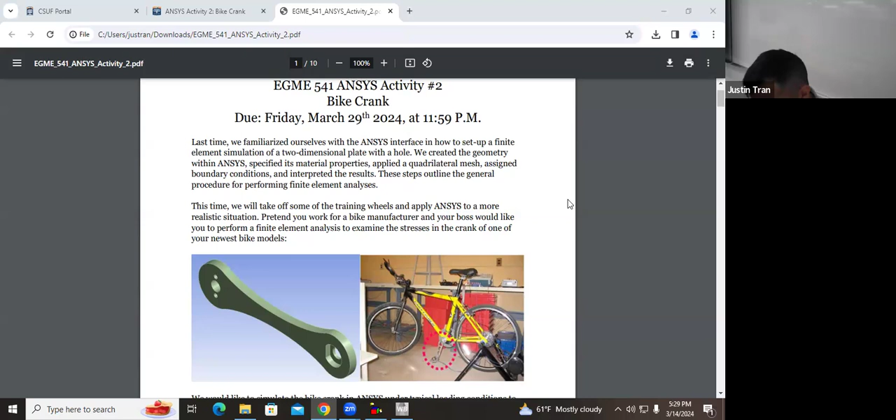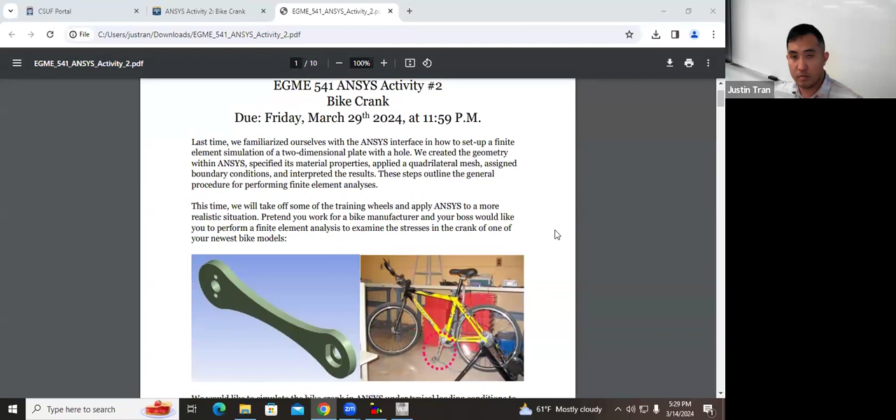I'm guessing the steering leg gets rounded, right? Okay, like how's it gonna, it kind of needs to grip from the ground. So far it's been tested on asphalt, sand, and grass. Oh okay, well those aren't really rough. Well, what about like marbles? I mean, I don't think there's much demand for a robot that walks exclusively on marbles. Maybe a rich person wants a different type of room, but maybe. If it's a smooth level surface like that, you can just use wheels, you don't need legs if it's... What if it's like the...

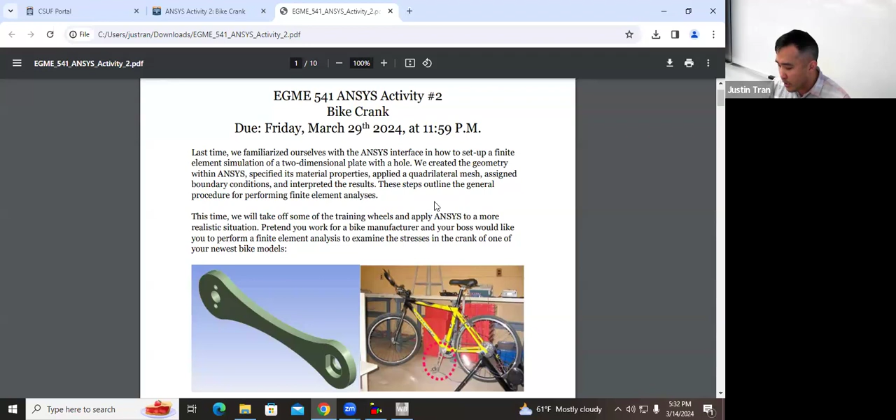We're going to be doing a simulation on a bike. If you don't know what a bike crank is, it's basically the part that connects the bike and the pedal. It's the part that cranks the bike forward—you push down on it with your foot to propel the bike forward.

The setting for this activity, or the motivation, is that you're going to be working basically for a bike crank manufacturer. We're going to run simulations to see if the bike crank is going to fail under the given loading or not.

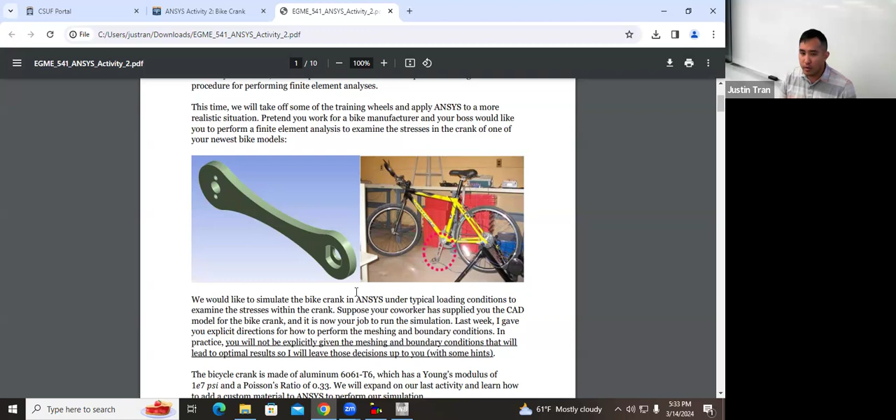Compared to the first activity, this time we're using a much more realistic geometry, one that's already made for you, so we're not going to spend any time making our own geometry here. We're going to be assigning our own material properties and applying the loads.

Compared to the first activity, there's not nearly as much instruction here, so it's not going to be as hand-holding as the first one—since you have all the knowledge from the first activity, as well as everything we've learned so far in the direct stiffness method. This activity is going to be more for you to take what you've learned from ANSYS and the direct stiffness method and apply it to a more realistic problem.

Okay, so let's go ahead and start up Workbench.

First thing we're going to do here is create our analysis system. If you remember, we looked on the left-hand side under the toolbox and chose what type of analysis system we're going to run for this simulation. The one we want is static structural, so go ahead and click and drag static structural into the project schematic. Once you do that, it's going to open up a window where we'll be operating on our activity.

Is everyone in Workbench with this part open? Good. First thing we're going to do here is add a custom material property—we didn't do this last time, since we just used a material already built into ANSYS by default. This is a really useful skill, because a lot of times in finite element simulation you'll be using materials that your company uses, or materials not already built into ANSYS. Knowing how to specify a new material based on its properties is really valuable.

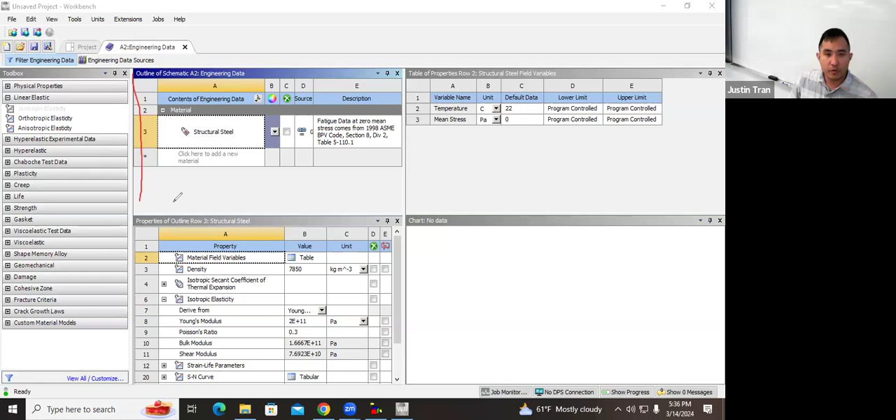To specify a new material, we're going to go to engineering data and double-click on it. As soon as you do, the window is going to change quite a bit, showing you all the different materials available to you. If you look at the center of the window, it tells you all the materials you currently can use—there's only one, so you should only see structural steel in there.

So what we're going to do is add a new material. To do that, click on the box that says 'click here to add a new material.' As soon as you click on that, it's going to let you type something in, so let's give our material a name. This is a completely custom material, so you can name it whatever you want—you could name it 'pee pee poo poo' if you want to—but usually it's useful to name your material after the material actually being used. The one we're using in this activity is an alloy of aluminum: aluminum 6061 T6.

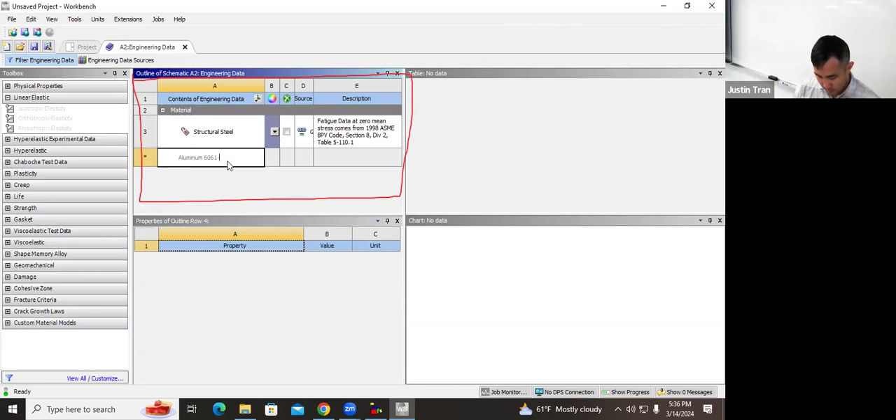Okay, so go ahead and type in the name of your material and hit enter. When you hit enter, it's going to create a new material here in your engineering data.

After you create your material, there's a blue question mark next to it. Whenever you see a blue question mark in ANSYS, that's its way of telling you that we need to specify more information before moving forward, because all we've done so far is give a name for the new material. We haven't specified any of its properties yet.

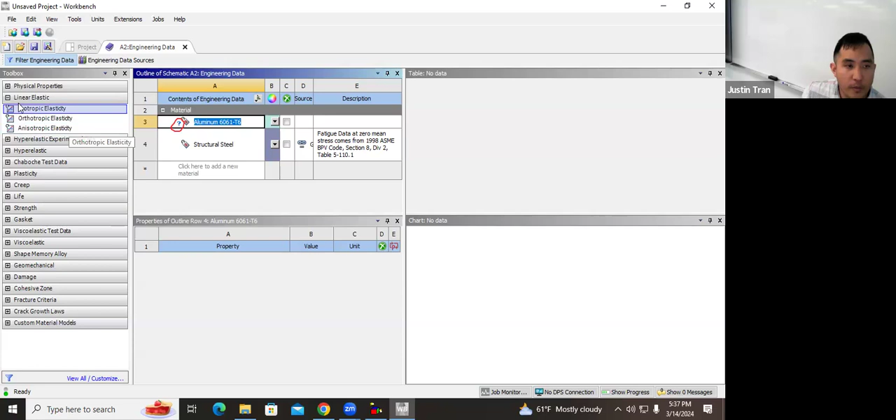But from here, you actually have a lot of different options. There are lots of different types of properties you can specify for your material. If you look at the left-hand bar, you'll see physical properties, linear elastic properties, hyperelastic properties, plasticity, creep, strength, all different kinds of things. All those different properties are used for different applications. But for a lot of applications, you only really need to specify a small portion of this.

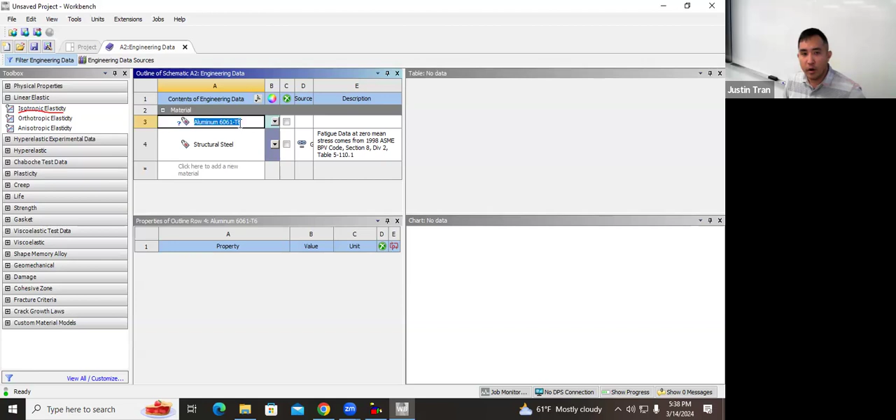For our case here, we're going to assume that our aluminum is an isotropic linear elastic material, so we're going to specify isotropic elasticity. While you have the aluminum 6061 T6 highlighted, you can either click on the row or click on the box itself. Then go to the left-hand side of the screen and double click on isotropic elasticity.

As soon as you do that, it's going to open up the properties window in the bottom center, and then you can actually start typing in the material properties.

If you look at the bottom middle of the screen, you'll notice there are two boxes in yellow. That's ANSYS's way of telling you that you should specify those two properties to fill this out. We need to fill in the Young's modulus and the Poisson's ratio.

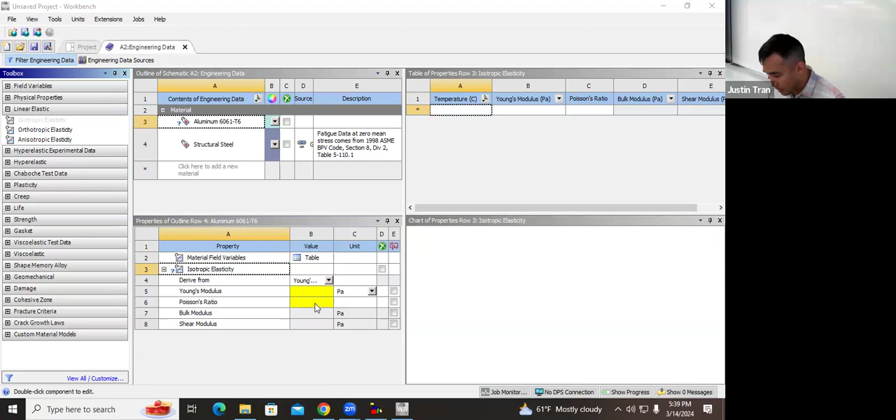For the Young's modulus, you can see the default is to specify it in Pascal. But if you look at the problem document, you'll see that the Young's modulus for our aluminum is actually given in PSI, so let's make sure we switch the units here to PSI.

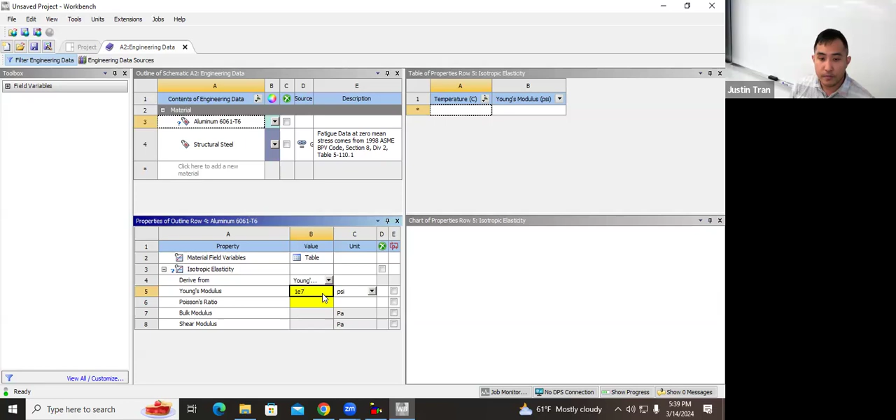We're going to input the Young's modulus of 1 times 10 to the 7th, so 1E7. You're going to enter 1E7 and then hit enter, and you want to make sure that you're in PSI. That's the number one mistake people make in this assignment - not changing the units for the Young's modulus.

The other thing we're going to input here is the Poisson's ratio. If you go back to the problem document, you can see that the Poisson's ratio for this bike crank is 0.33, so we're going to enter 0.33 here.

So all we've done here is define a new material, aluminum 6061 T6. We've defined it as a linear isotropic material, and we input the two material properties needed for it, which are the Young's modulus and the Poisson's ratio. Any questions on this?

How do you know the material is isotropic? It's a good question. Usually most metals are going to be pretty isotropic, just because the molecular structure of the metal is pretty uniform in all directions. That basically means the strength is going to be the same in all directions. Most metals behave like that, though there are exceptions - it really depends on the type of material you have.

If you have something like a wood material, wood usually has a grain direction, so you're going to have more strength in that direction. For those, I would specify an orthotropic elasticity type of material. A composite material like carbon fiber is going to behave differently too. So every material is a little bit different, but for the most part, most metals are pretty isotropic.

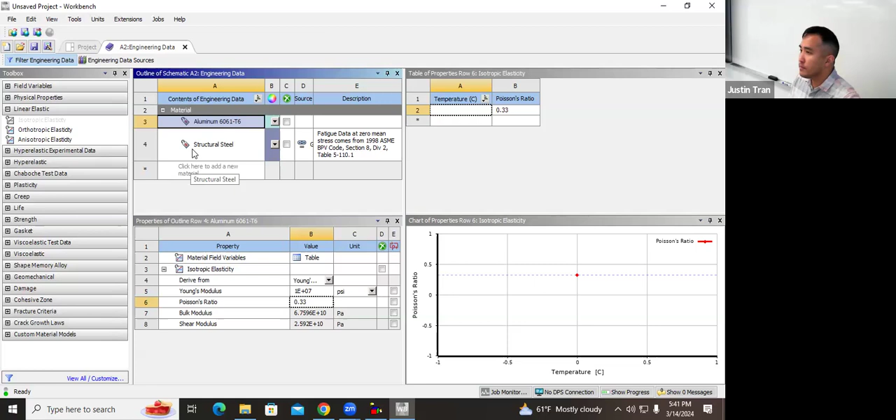Any other questions on this part here? Okay, all right, so let's go ahead and close out of this.

So we've done everything that we need to in the engineering data, so let's close out from this tab. If you go to the top ticker here, there's a tab called A2 engineering data, and you can just click on the X to exit out of that. That'll bring us back to Workbench here.

So the next step here is we need to import our geometry. Unlike the first activity, where we drew our geometry from scratch, here we're going to import it because someone else has already made the CAD file for us. This is pretty typical. A lot of times when you're running finite element analysis in a company, you're either going to create the CAD file in another software, like SolidWorks or CATIA, or someone else is going to make it for you and give you the file.

To import a geometry, you're going to right-click on geometry here, then go to Import, and click on Browse on this button here. What this will do is open up a file explorer where you can upload or import the CAD file.

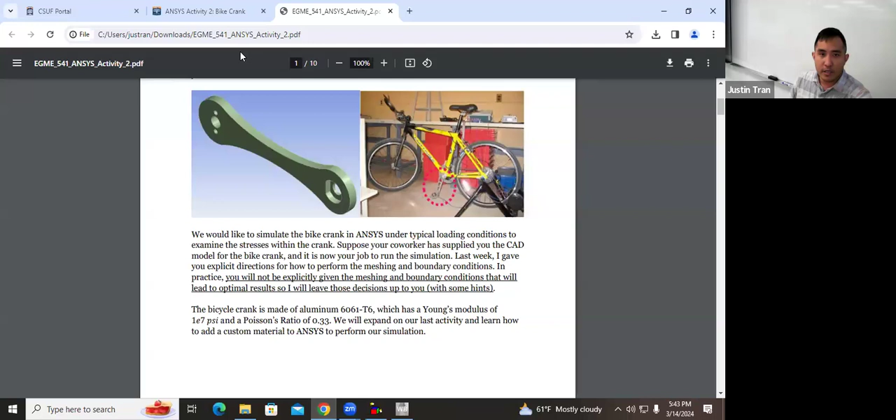If you haven't done so already, the CAD file for this activity is given. If you go to the Canvas site under ANSYS Activity 2, you'll see there's an additional download here for crank_assembly dot x_t. Let's go ahead and import that. To import the geometry, you can either double click it, or click it and open, either one's fine.

You'll notice that after you do so, there'll be a green check mark next to the geometry, which tells you that the import worked.

The main question I usually get in this part is: what are the file formats accepted by ANSYS? If you notice the file format for the part we just imported, the file extension is x_t. Windows may misidentify this as a SolidWorks file format, but x_t is actually a file format called Parasolid. Parasolid files work.

Another file format that's very common is IGS format, so that's .igs or .iges, they both work. I would say those are the two most common ones that are used.

A file format that won't work is a direct SolidWorks default file format, so that's SLDPRT or something like that. The pure SolidWorks file is not going to work with ANSYS. So if you want to take a SolidWorks part and import it in ANSYS, you need to convert it to one of these file formats, either IGS or the one we're using right now, x_t.

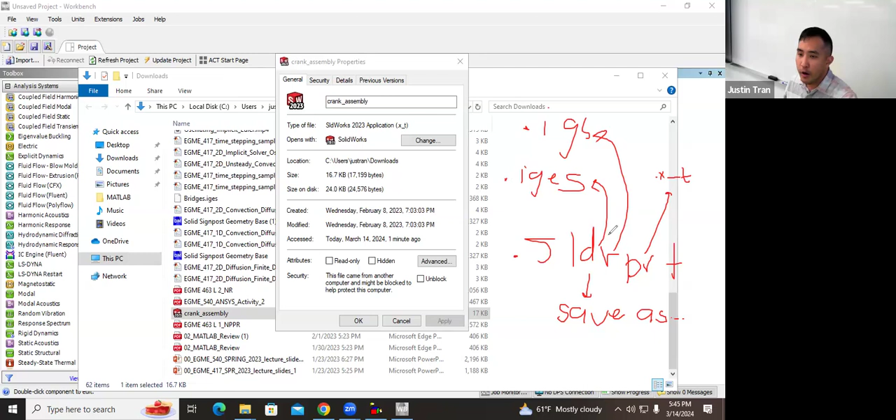When you have your part or assembly open in SolidWorks, all you have to do is just save as, and then save as one of these other file formats. But you do need to convert a SolidWorks file to one of these in order to use it with ANSYS.

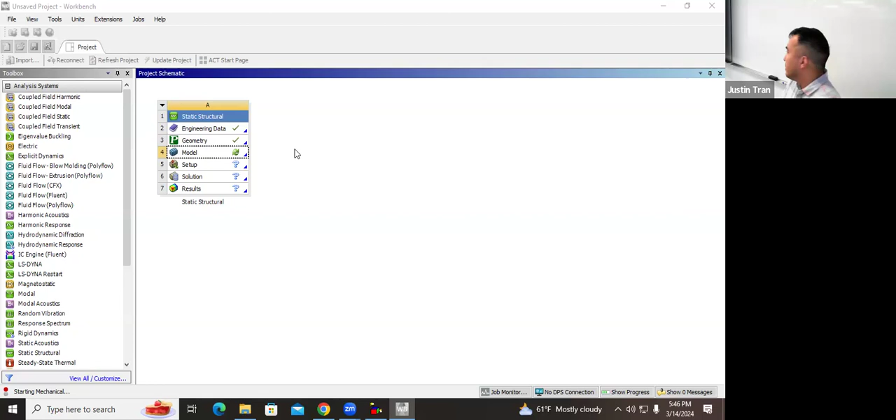All right, so now that we've imported our geometry, we are ready to open up ANSYS Mechanical. Go ahead and double click on model here. When you double click on model, it's going to open up ANSYS Mechanical. It might take a couple minutes to do so, but it'll get there eventually.

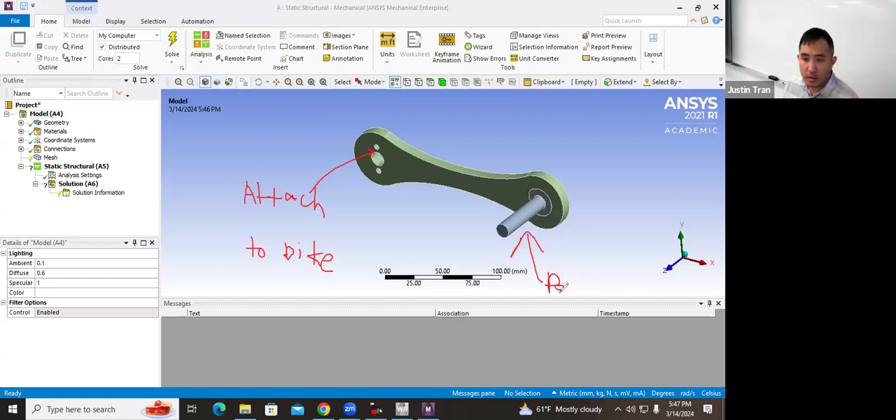Okay, and on this side we have the pedal side. This is where normally a person is going to be pedaling down. The pedal itself isn't there, but the little shaft that comes out is there.

So is everyone able to open ANSYS Mechanical and see the part as it is here? Okay, good.

The first thing you should notice about this part is that this is actually an assembly, with three different parts. Part one is the crank itself. Part two is this little shaft here that comes out for the pedal. And part three is this little mating ring that fits in between the crank and the pedal itself.

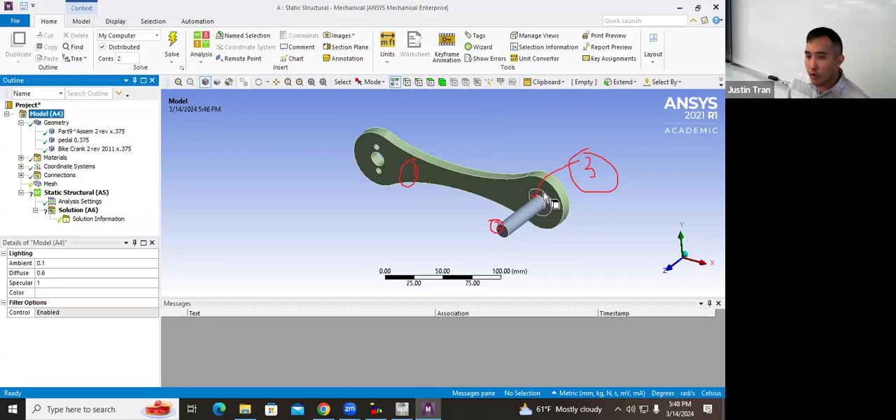The first thing we're going to do is, because our analysis is mostly focused on the crank itself, learn how to suppress different parts. This is very common. When working with finite element analysis of pre-made CAD files, oftentimes you don't need every part in the assembly. You want to just focus your analysis on the part you want to focus on. All the other parts just create dead space for you.

They're going to gunk up your mesh, or cause your simulation to be more expensive than it is. So to get rid of a part or suppress it from your analysis, what you need to do...

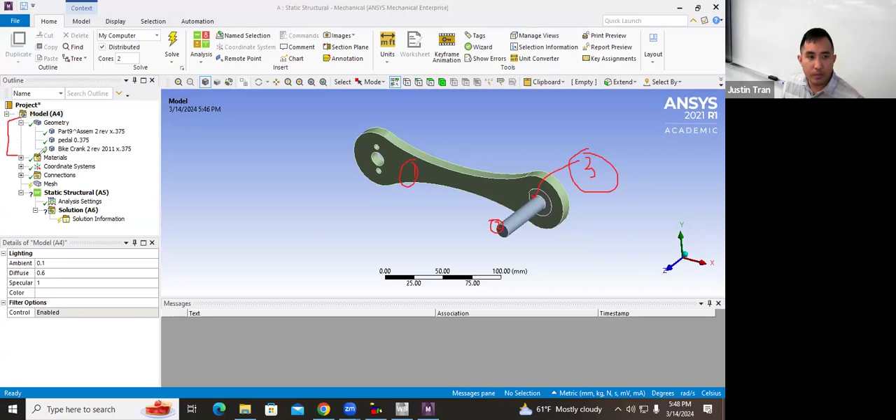Go to the left-hand side of the screen, go to the geometry tab. Expand that menu, and you'll see all three of the parts: bike crank 2 Rev 2011 X 0.375, the pedal 0.375, and the part 9 caret Assem 2 Rev x.375.

All we care about is the crank, so we don't really care about the pedal or the mating fitting at this point. To suppress a part, all you have to do is right click on the part that you want to suppress.

Then click on the button for suppress body. Go ahead and do that - you can do that for the pedal, or for part 9. If you notice, as soon as you do that, that part disappears from the image here.

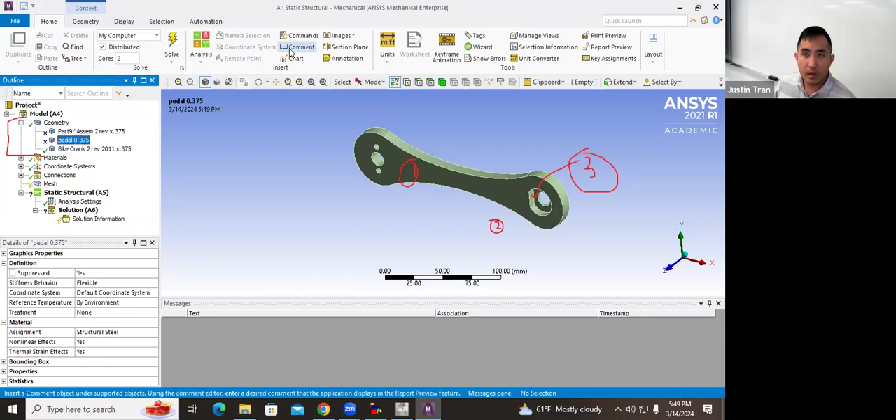I'm going to do the same thing for the pedal. Let me right click on pedal here and click on suppress body. That gets rid of the pedal as well. Make sure you do that - make sure you clear the other two parts.

The next thing we're going to do here is assign a material. Remember, we defined that custom aluminum material, and we want to make sure we actually assign this to our geometry here.

Under the same geometry menu up here, you're going to click on the bike crank object itself - bike crank 2 Rev 2011. Then go to the bottom left-hand side of the screen, and you'll see there's an option here for material assignment.

Right now the material for this crank is structural steel, and we want to change that. Let's go ahead and click on structural steel here. You're going to click on this arrow to expand the menu outwards.

Then you're going to change the material to your aluminum material that you defined earlier. Go ahead and click on aluminum, and that changes the material assignment of this part.

Any questions on that? Is everyone able to suppress the parts and assign the materials to the bike crank?

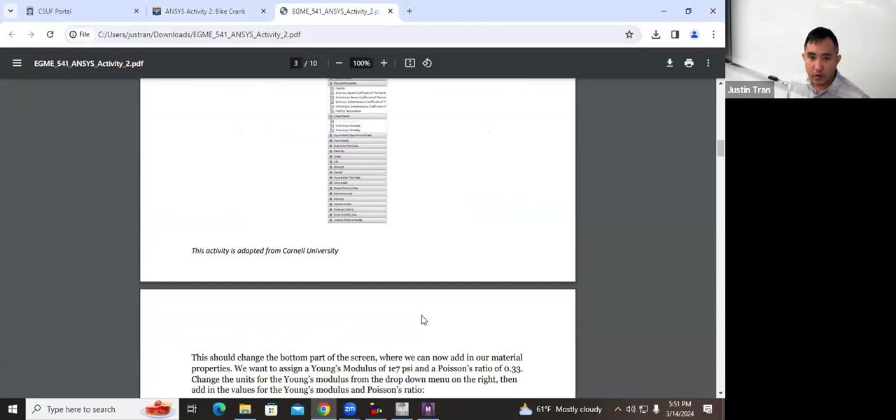All right, so that's all the new stuff for this part. The next step here is going to be the meshing. If you go to the problem document here, let me scroll down - we've done everything up until meshing here.

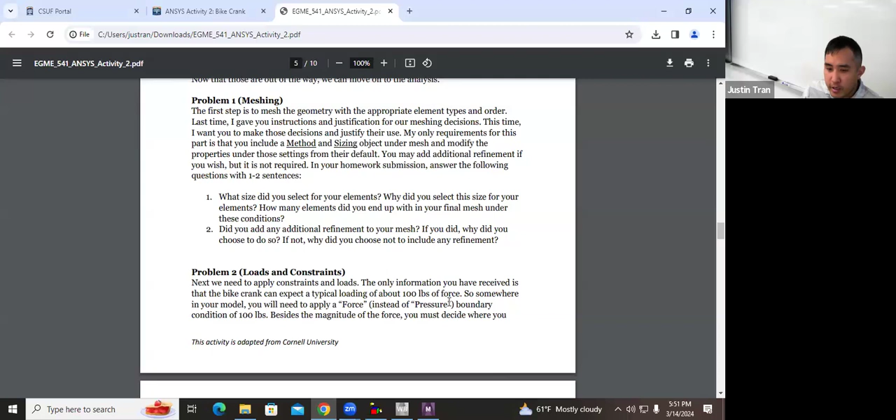So your next goal here is to apply meshing settings. The main thing you're going to set here is the size of the elements. If you follow the document here, it's going to say to create a method and sizing object - that's a little bit overkill.

The only thing I need you to do here is specify the size of the elements. When you left click on mesh, it's going to ask you for the element size here. Go ahead and assign a size for the mesh.

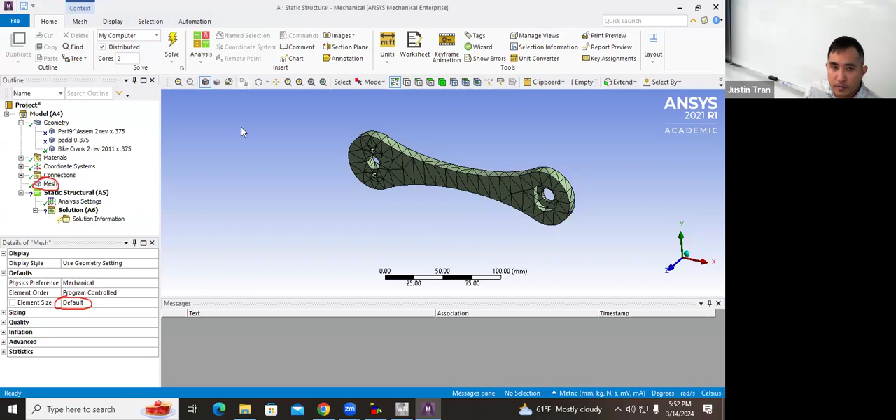And if you want, you can change the units as well. I think the default units is millimeters, but you can change it to US customary inches as well. So from the 5 inches, smaller.

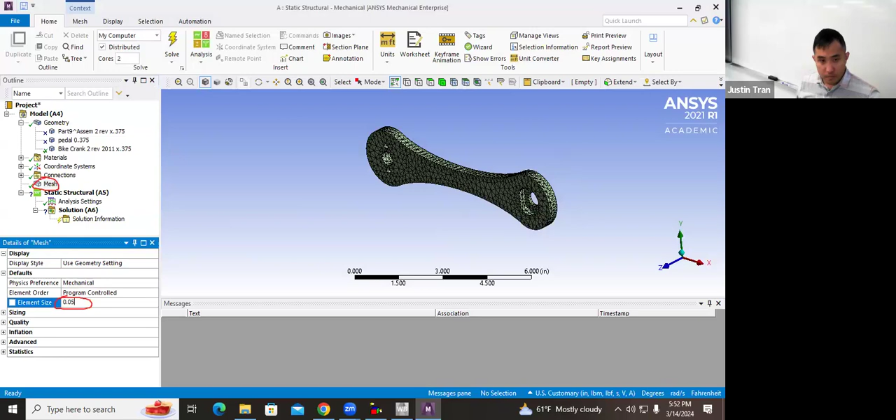So you could try different settings for the mesh. There's a lot of different meshes that'll work for this one. Again, this is still a relatively simple simulation, so there's a lot that can work. But your mesh should look roughly something like this.

So you should have a pretty good mesh density. In particular, if you rotate the part on its side, you can see here that we're looking at the thin dimension. If you look at this cross section here, you should see multiple layers of elements going across.

This is really important and a really good metric to know for finite element meshes in general. Whenever you have a mesh of a relatively thin object like this, you should be able to see multiple elements through the thickness, and it shouldn't just be one element across like this.

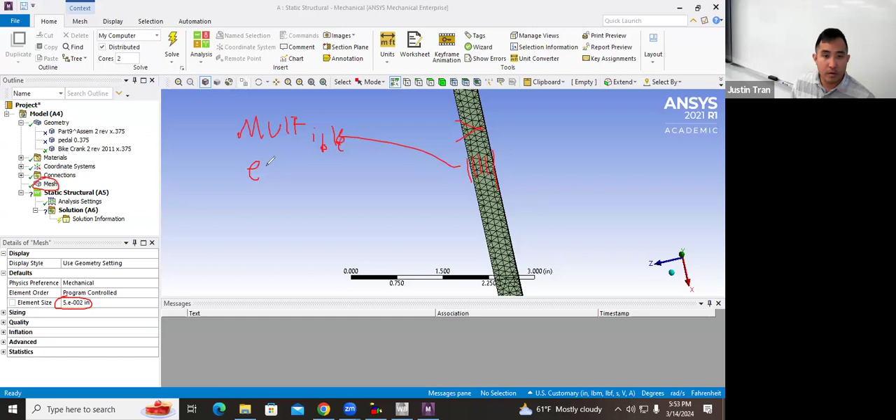The reason for this is that generally speaking, when you're making a finite element mesh, you want to have a good amount of what's called interior nodes—nodes that are on the inside here that aren't on the outside edges. So to do that, you need to have multiple elements through the thickness of the part.

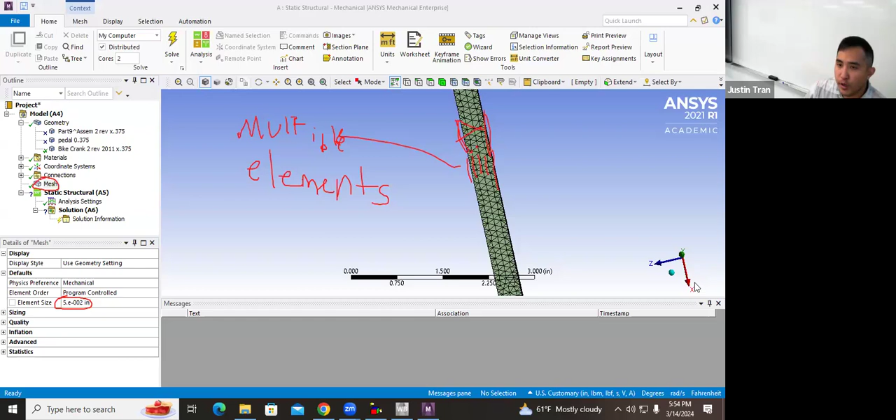So you want to avoid cases like this. Let me generate the mesh. You want to avoid cases like this where you have one element that goes all the way across the structure. So you want to have a good amount of elements through that thickness.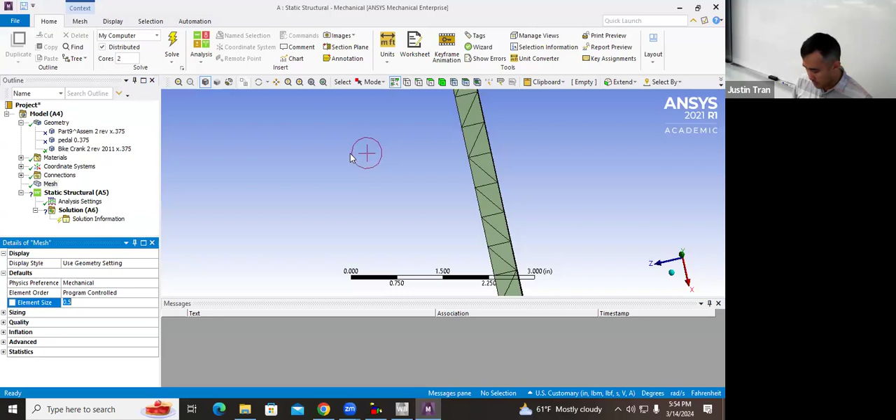Ideally you should have maybe 3 or 4, but even just 2 elements makes a world of difference. All right, any questions on the meshing here?

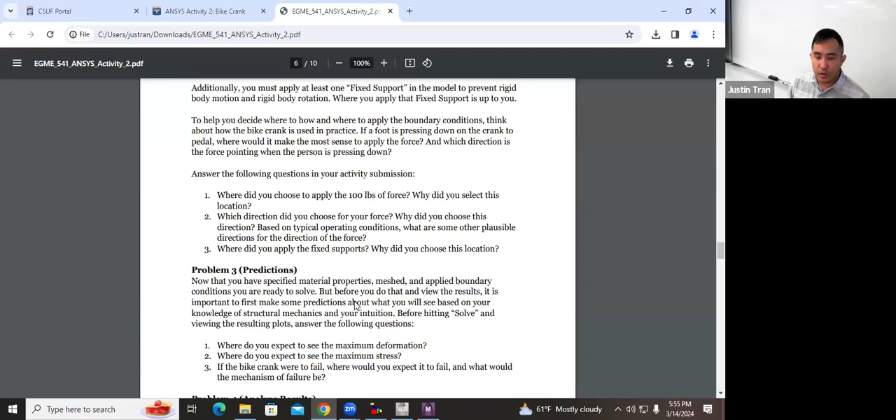So this next part, I'm going to let you guys work on yourselves a bit, but now you need to specify the boundary conditions—that means the loads and constraints. Just like we do for our direct stiffness problems, we need to have at least one fixed support.

To apply boundary conditions, you're going to right click on static structural A5, go to insert, and apply a fixed support. I also want you to apply a force, so you're going to right click on static structural A5, go to insert, and click on force here. That lets you apply a force in a certain direction.

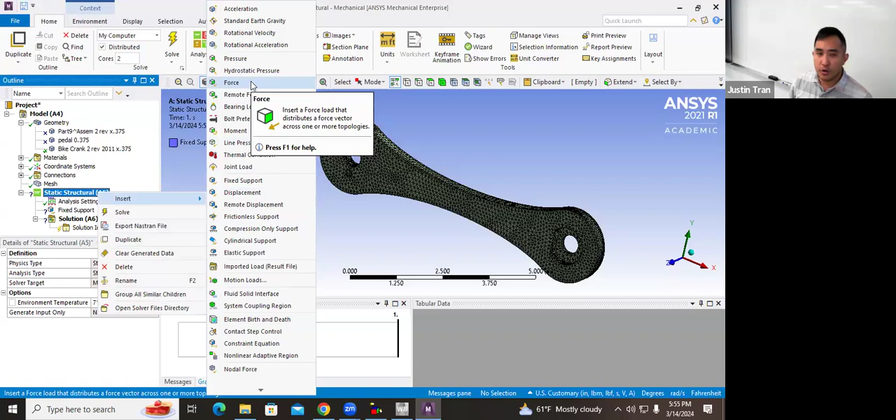But I want you guys to determine where these boundary conditions are applied, and even more particular for the force, I want you guys to determine what direction makes the most sense for the force.

For the force, remember the way that I generally like to do it is I like to specify my force in components. When you click on the force, if you go to the bottom left of the screen, you'll see there's a setting called define by. Instead of defining it by the vector, you can define it by the components, which lets you specify the X, Y, Z components of the force individually. I think that's a bit easier to specify.

So I want you guys to determine the direction and location of the force, but I want to give you a couple of hints. Remember when we first opened up this file, I mentioned that the side of the bike crank with the 3 holes is the part where it attaches to the bike itself. Whereas the other side of the bike crank with the single hole, this is where the pedal usually is.

So the pedal side is where a person's going to be applying their force, applying their weight, okay? And the bike side is where it's going to be attaching to the bike frame.

I want you guys to use finite elements to simulate a worst case scenario. Think about what the worst case scenario would be in terms of causing this bike crank to fail or to rupture, okay?

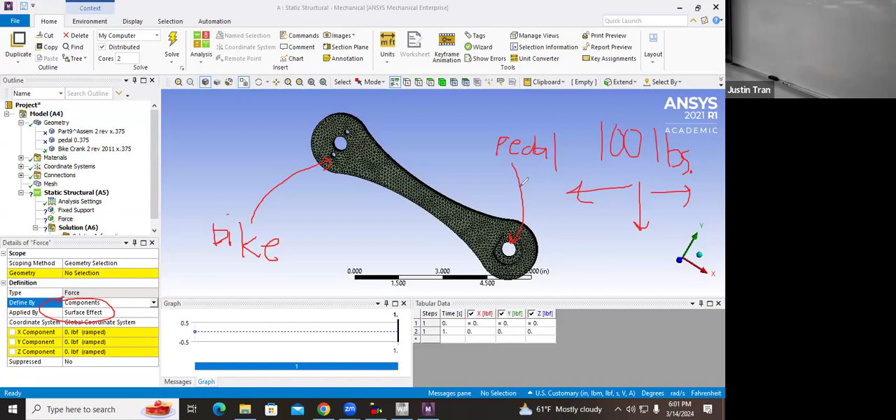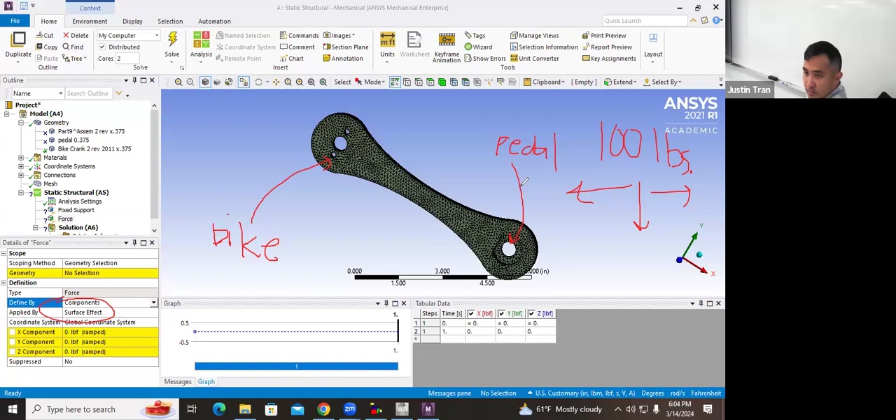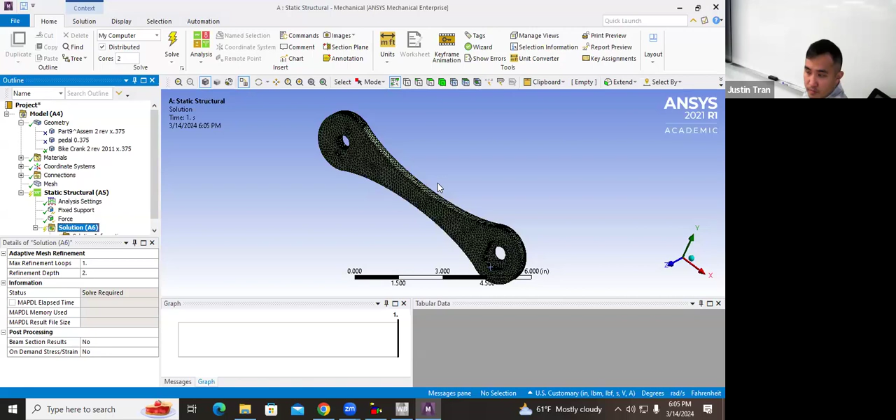All right, how's everyone doing? Everyone still applying their boundary conditions? Okay, all right, so I'll let you guys play around with that a bit more.

I'm gonna show you how you can check your results right now. So now that we have the mesh, now that we have the boundary conditions, we are ready to run the simulation. But before we run it, we need to specify our output field.

So we're gonna right click on solution A6, we're gonna insert. The first thing we want to see here is the total deformation, so make sure you specify that as one of your output fields. The other thing we're going to specify here is the equivalent stress.

So we're going to right click on solution A6, go to stress. Make sure you click stress, not strain. And you want to view the equivalent stress. Okay.

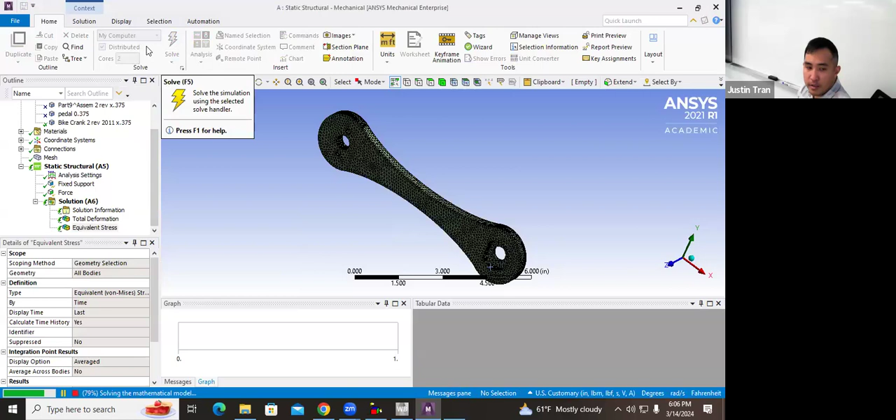All right, so let's go ahead and click solve. Solve with the lightning bolt that's kind of at the top of the screen here.

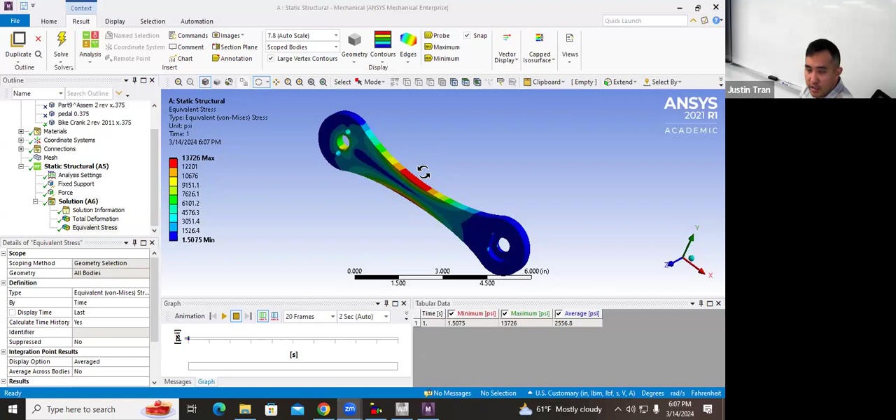Depending on the direction and location of your force, your stress may be different. So if you did not get this stress, or at least this distribution, you may want to reevaluate. Maybe change the direction of your force, maybe change the location.

But to give you a hint in terms of how I obtained this: whenever you have a situation where you have a beam or anything that's fixed on one side, the loading situation that's going to cause the most stress or danger of breaking is bending.

So you want to think about what direction you want to put your 100-pound force to force this bike crank into a bending mode. If you're not getting a stress as high as this, you may want to change the direction of your force.

So that's the first thing to do. I want you to find the direction of force that would put this cantilever beam in bending, so that you can recreate the same stress that I'm getting here.

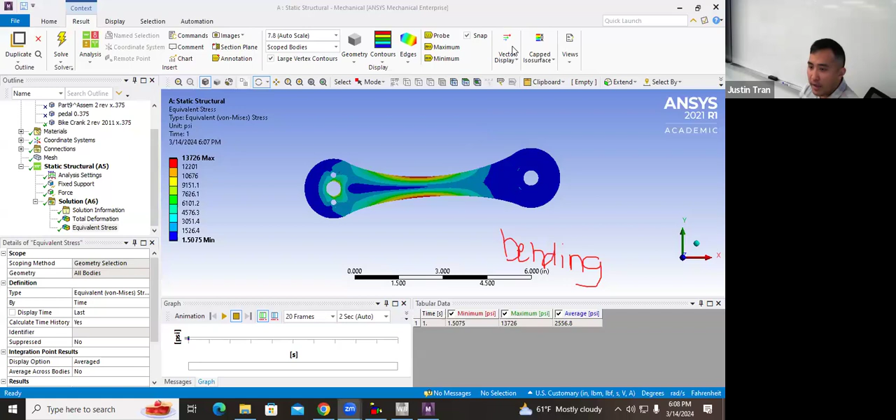The stress is a really important field to analyze in ANSYS. In fact, it's one of the more powerful things you can do in ANSYS, because you can test whether or not your part is going to fail by looking at the stress field.

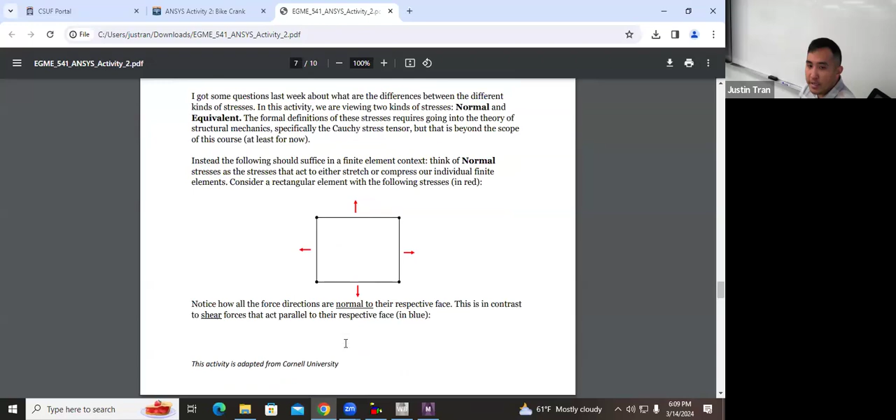Every material has a property known as its yield strength. The yield strength of the material is the maximum amount of stress it can sustain before it breaks or before it goes through plastic deformation. For the material we're using, it has a yield strength of 35,000 psi.

So that means we can keep loading this, or keep increasing the force on this bike crank, continuously until we reach 35,000 psi, and that's the point where the bike crank is going to fail.

For the last part of this activity, I want you to find out what's the maximum force, or maximum load, that the bike crank can handle before it fails. So I want you to take your force and increase its magnitude until you reach a failure point.

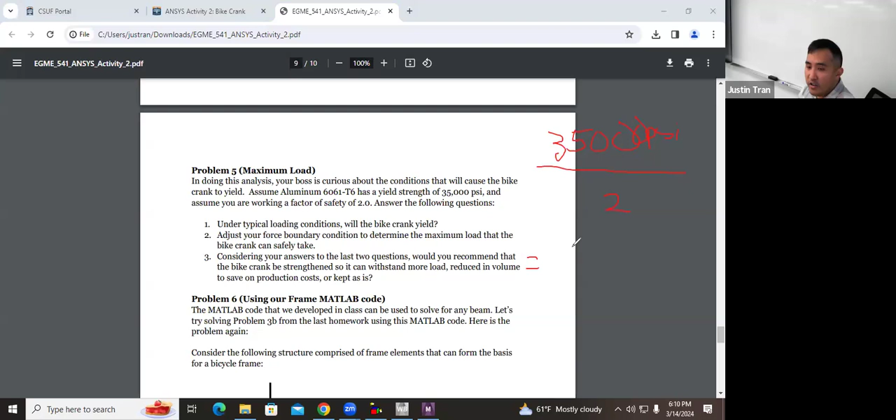But I want you to do this with a safety factor of 2.0. What that means is I'm going to take my yield strength and divide it by my safety factor of 2, which gives me a maximum stress of about 17,500 psi.

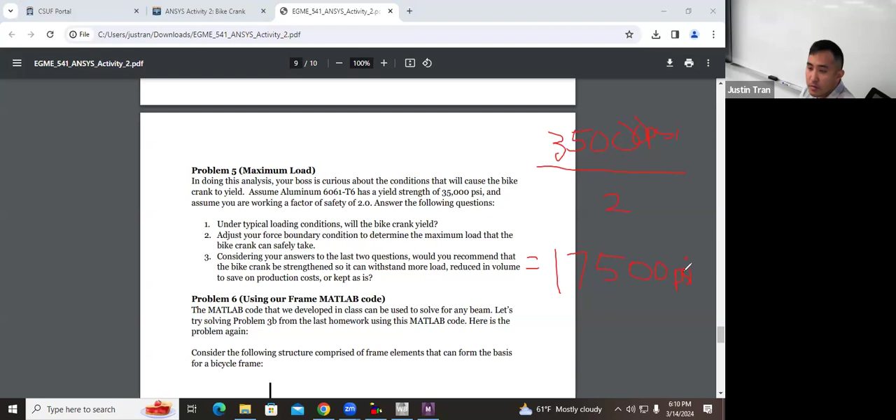For problem 5 of the activity, it's kind of a spoiler but it's shown on the screen here: once you have your force in the y direction like this, I want you to steadily increase the force until you reach a maximum stress of 17,500 psi.

The way to do this is you go to your force boundary condition and increase it. Let me increase it by 5 pounds, so instead of 100 pounds, I'm going to change it to 105.

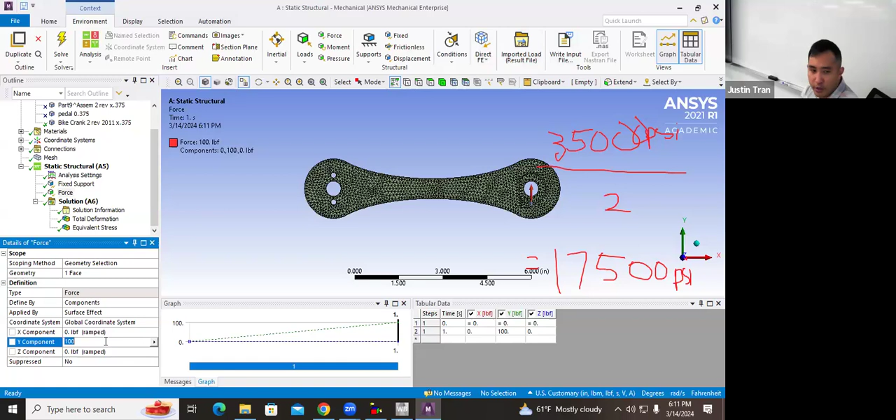I'm going to rerun my simulation and see what the maximum stress is. The maximum stress is given by the maximum value of this colored line right here. So you can see that when I increased the load to 105 pounds, the maximum stress increased to 14,412 psi. You would basically keep increasing the force until you reach that maximum of 17,500.

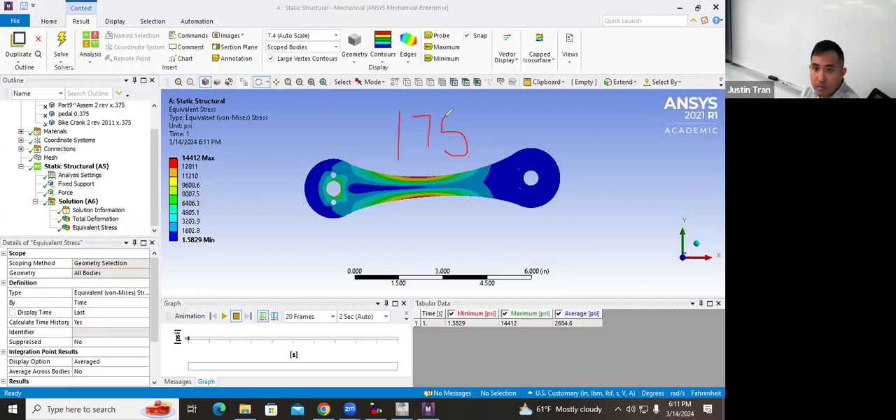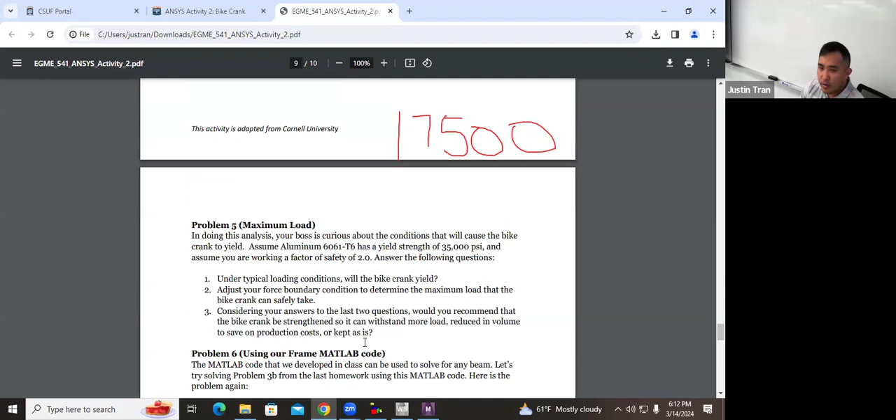Okay, so that's the activity there. Not too much with the ANSYS stuff, it's just a lot of things that you kind of play around with.

The second part of the activity also has some additional problems for you to do, just like the first ANSYS activity. Problem 6 on the ANSYS activity is to utilize your frame code. Remember last week we worked on this code in MATLAB that we developed to simulate frames under the direct stiffness method.

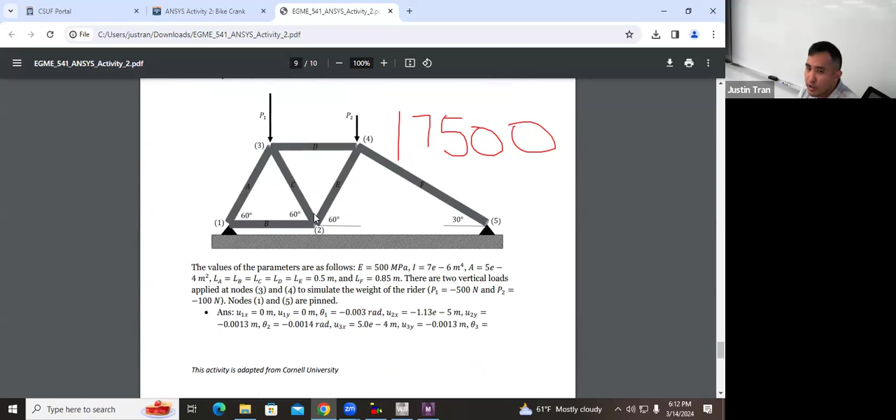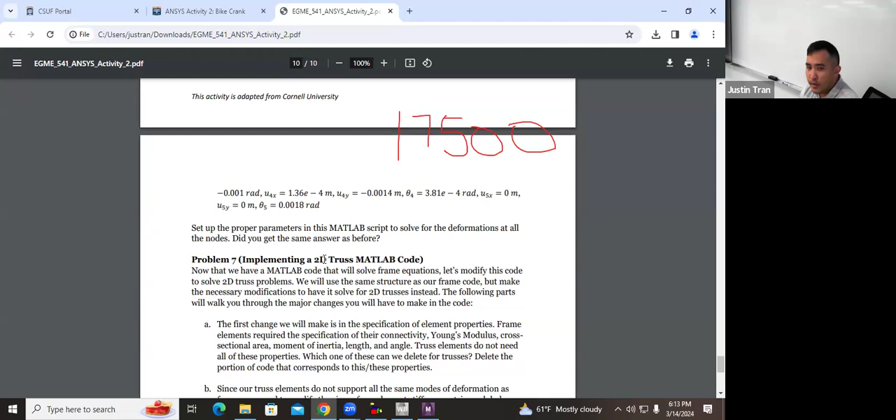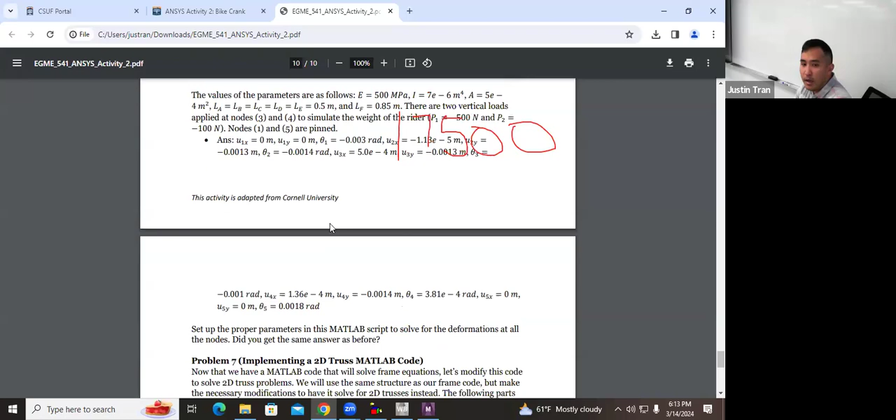Okay, problem 7 is the assignment I told you about at the end of class last week, where I want you guys to implement a 2D truss code from scratch. Take what we learned, the whole methodology and logic we developed for the frame, and do that for the truss here.

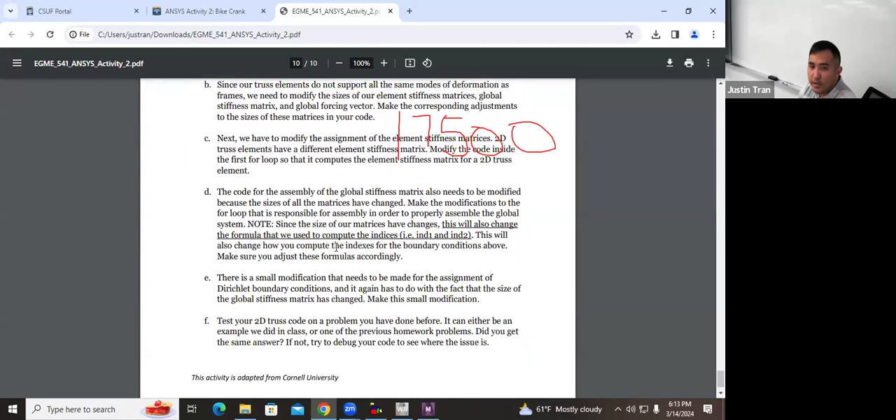I've written you a step-by-step process, step-by-step instructions to help you out with that. All right, so that's the plan for the rest of class today.

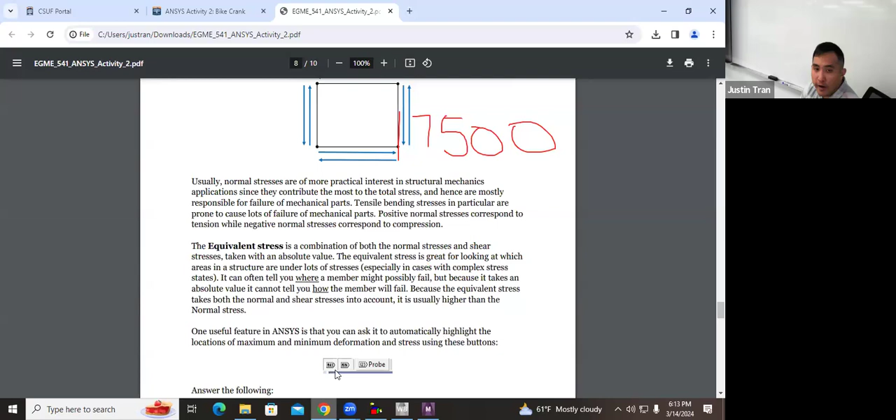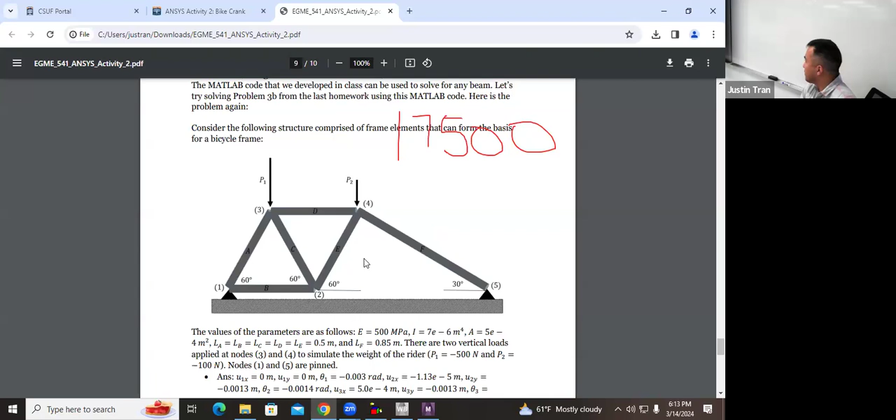For the rest of class today, feel free to play around with this simulation as much as you want. Change the mesh, change the loading. I want you to find out what the maximum load the structure can withstand is in terms of pounds. Then from there, you can work on the MATLAB stuff. Any questions on any of this?

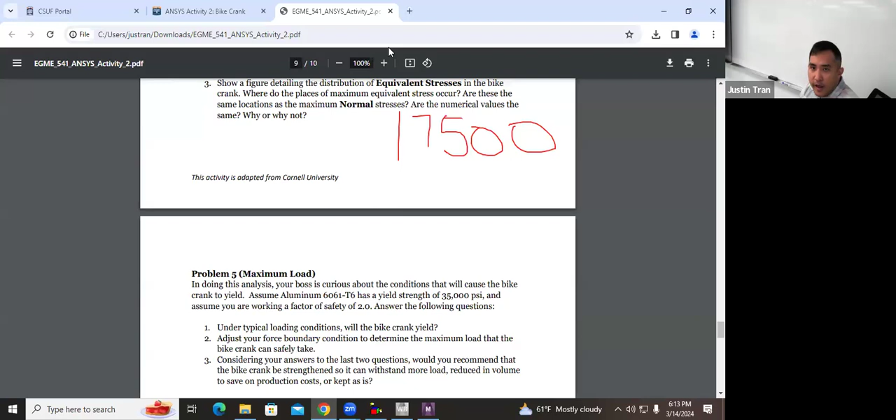Okay, all right, so I'll let you guys work on that. And actually, I'm not sure if I posted the completed frame code, so let me do that, just so you have it for your reference.

So we go to week 8. All right, so if you either don't have your code right now, or if it's at home, you can download the completed frame code here. If you go to the week 8 page on the Canvas site, you can download the MATLAB code frame_FEM_code, which has the completed frame code you can use for problem 6 on this activity. But of course, the truss code you have to write yourself, so you have to write that from scratch.

All right, and if you have questions, if you want me to look at your code, or if you have questions on the activity, just raise your hand, and I'll come around and help you guys out.

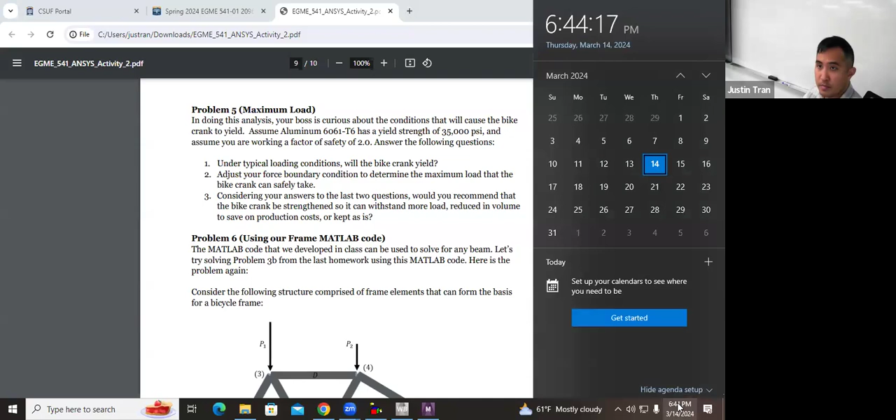And so. You wanna? Yeah, yeah. Thank you, yes. Thank you, yep, have a good weekend.